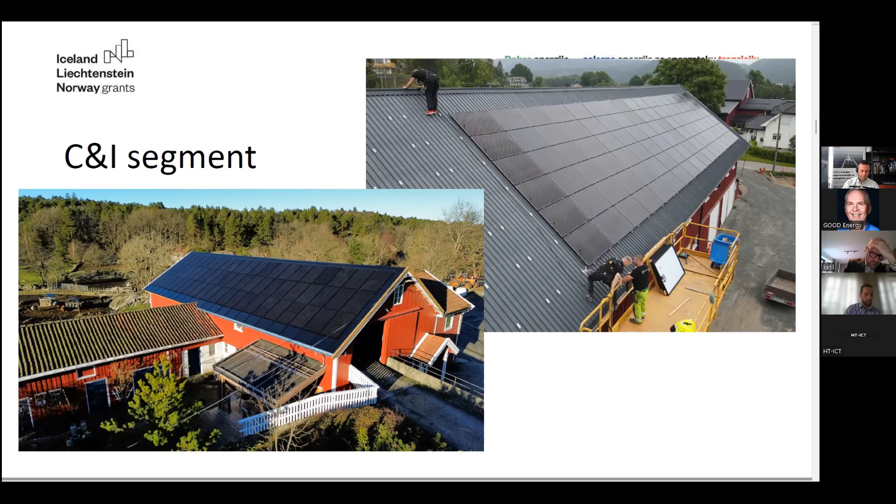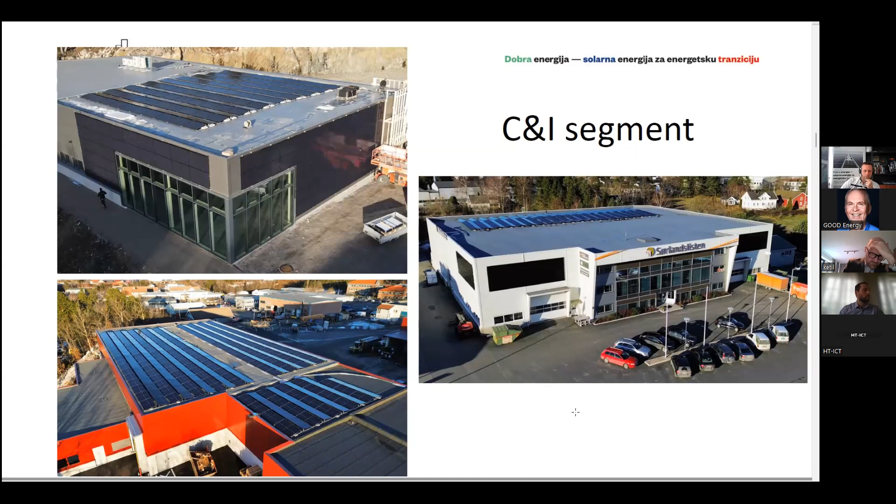And on the west facade. And this is actually our warehouse. So the picture on the bottom left side is where we sit, and here we have really tried to max out the number of panels on this building. It's here that we have one of our warehouses in the south of Norway.

It was not our main focus a year ago, but now it is clearly ground-mounted solar parks, so utility scale constructions. As I said, we are building a 45 megawatt park in Bosnia. I don't have a picture of it here, but I think it's coming later. Here is an illustration picture of a park that we will start construction on in a few months in Norway. So this is an illustration picture, and it's a 6 megawatt solar park.

We are still waiting for a few agreements, but we expect to start building it very soon. This will be maybe Norway's first ground-mounted solar park. There have been a few pilot installations below 1 megawatt, but this will be the first utility scale grid-connected solar park.

I think I had a small video of the park in Bosnia, if it works. We'll see.

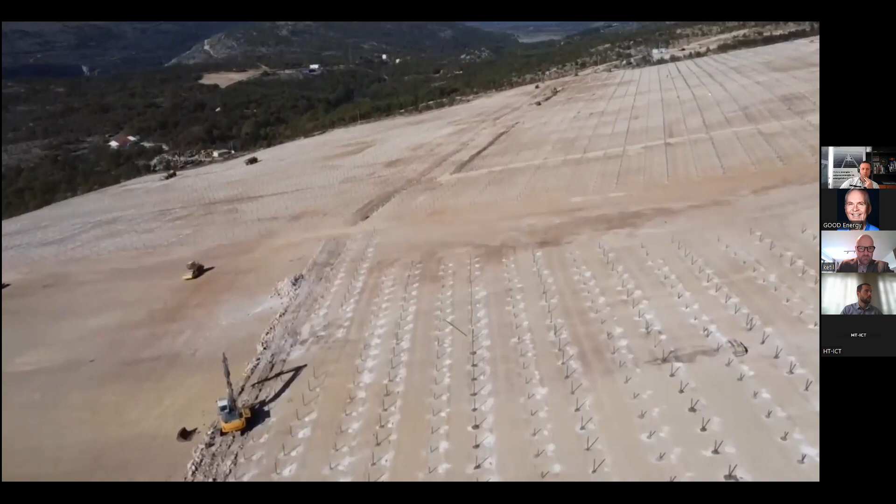Okay, back to the presentation. So that's the solar park I was talking about. That was already a few months ago. So now the panels are coming actually on all the mounting systems.

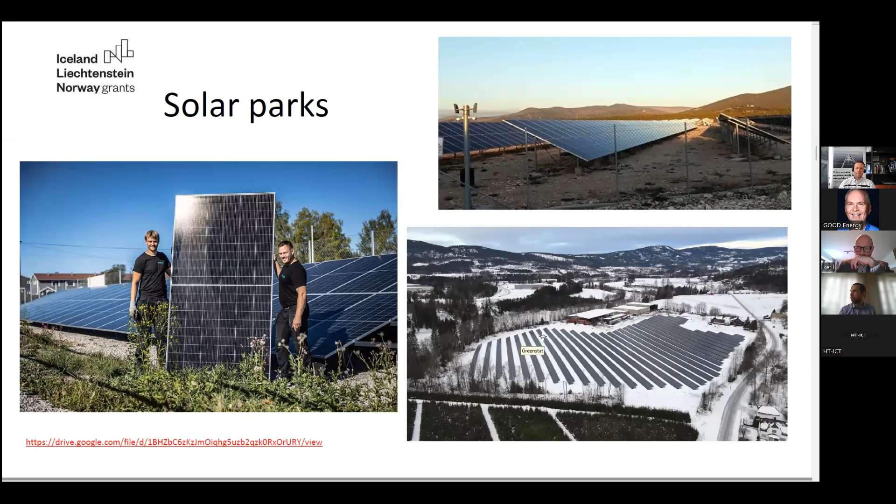Solar panel technology. So how does it work actually, a solar panel? It's a panel that absorbs light and converts it to electricity. It should not be confused with solar thermal panels that are producing heat with fluid, which can also be used for heating water, for heating needs in buildings. But when it comes to electricity, the best is to use photovoltaic panels. So it's the photovoltaic effect.

The goal is to absorb the photons, the particles of light, harvest them, and make as many electrons as possible. Electrons are what conducts electricity. So we see the spectrum of light coming into the atmosphere, the one with the colors. It starts from ultraviolet to the visible spectrum, what we can see with our own eyes, to the near infrared and high infrared wavelength. So here it's in wavelength.

And then we have to choose a material that can absorb this light and convert it into energy. Silicon is the most used material today. Many alternatives have been under various research stages, but none have managed to surpass silicon in terms of efficiency and costs.

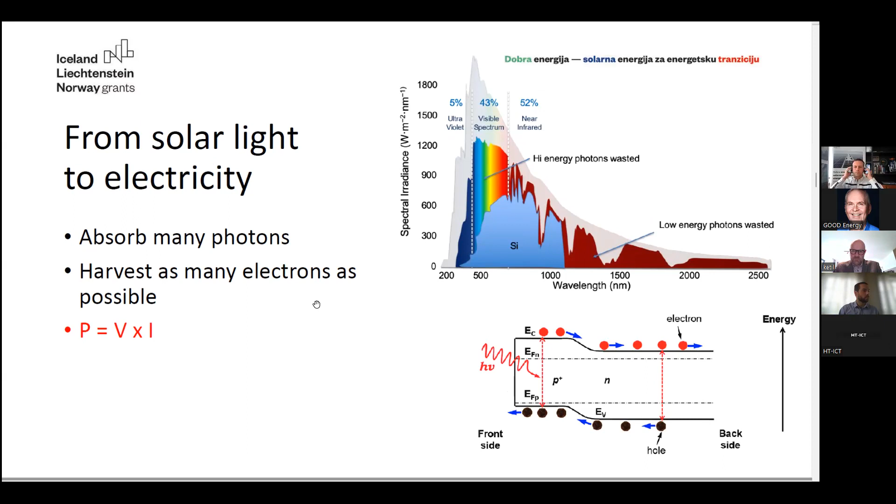Then came the PERC solar cells, which are not shown here, which is now the main technology. It represents, I think, 50% now of market share.

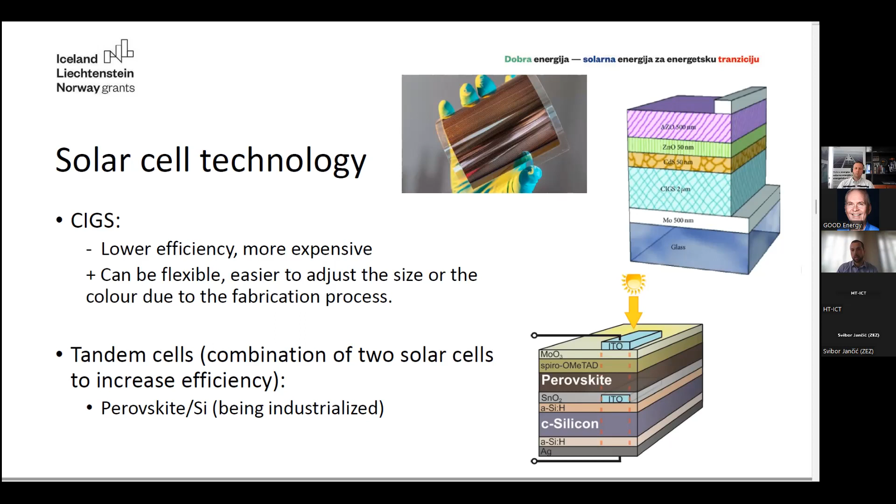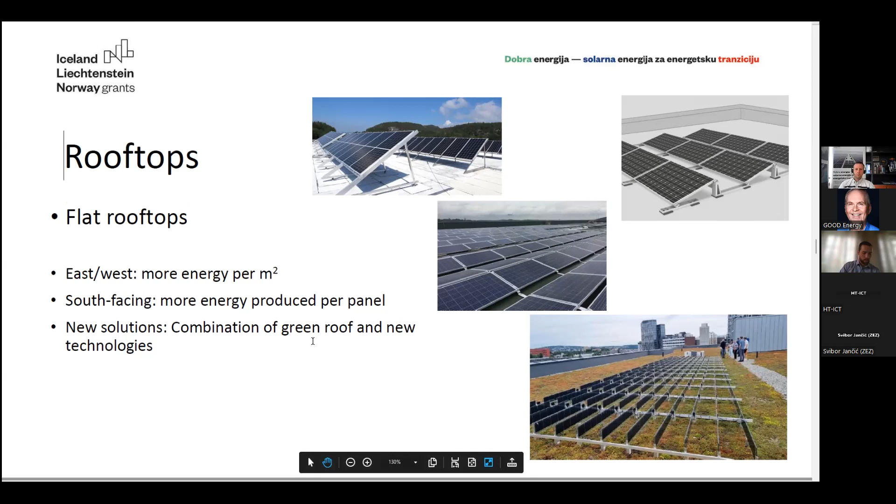Why doesn't it want to go back? I'm not used to PDF, I guess. Why does my keyboard... just give me a second. There you go.

So, pitched rooftops. For pitched rooftops, there exist many different mounting systems to adapt to every kind of technology - for tiles, for flat tiles, for metal sheets. You can also integrate it into the roof. There's also something called bituminous rooftops. Some of them generally don't have a very high slope, but you can have like 10 degrees, and there are also technologies made for installing panels on these rooftops.

So for whatever type of rooftop that you have, there is something that can be found to put solar panels on it, basically. These are actually installations that we made, and I wanted to highlight this one, which is, as I talked about briefly, integrated in the rooftop. We see the solar panels, and they have actually replaced - there are no building elements under the panels, just some frames that make the panels waterproof.

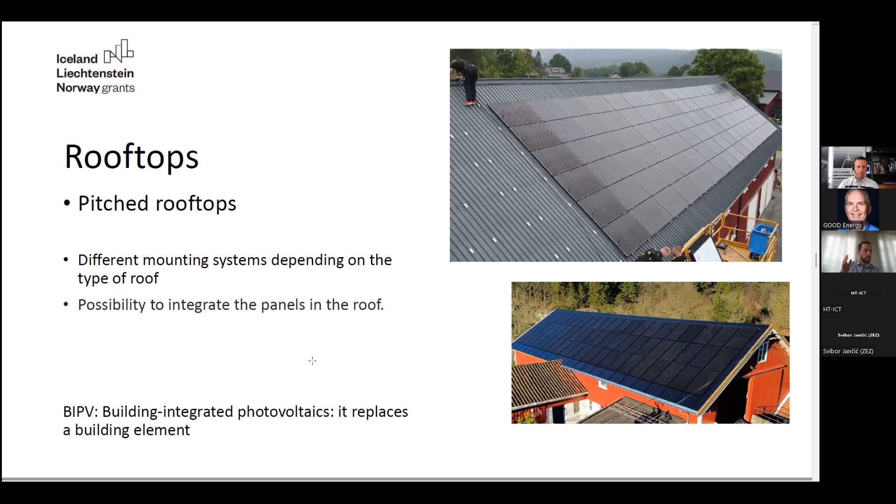Facades, many possibilities with different panels and different colors. We have mainly, in our company, dealt with silicon panels because it's the cheapest. They are just black, so they are not the most aesthetically pleasing panels, but as we were dealing with industrial actors, the financial aspect of it was very important. So it's the panels that give the shortest payback time, basically.

They can be installed on existing facades, but also integrated in facades. Another technology is CIGS, and as it's a printed technology, it's much easier to adapt and have different panel sizes. So you see on this picture, all that is blue, kind of golden, and this azure blue or green, are solar panels with different sizes. You don't see the solar cells in them because they have no solar cells, so it's a bit of a different technology. I think that's what has been used also on this building - it's CIGS.

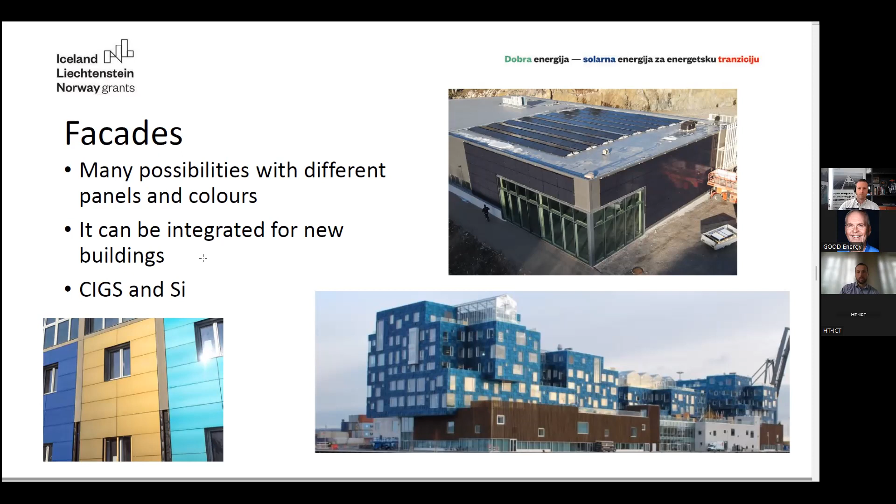Integrated panels - panels can replace building elements and give a new aesthetic to buildings. Here, for example, it's a solution with these tiles. I don't know the name in English, but it's these old tiles that you could find on churches and in many countries in Europe that have this diamond shape. But here, actually, all of them are solar panels. So you can really see that there exist technologies or solutions for every kind of building, for every kind of historical looks or criteria, or for financial criteria. Here is also an example of very small solar panels to make a kind of canopy.

It's bifacial, so I think it gives a very futuristic look to the building to have bifacial panels, because you see the technology, but at the same time, it's well integrated. It gives like a glass aesthetic.

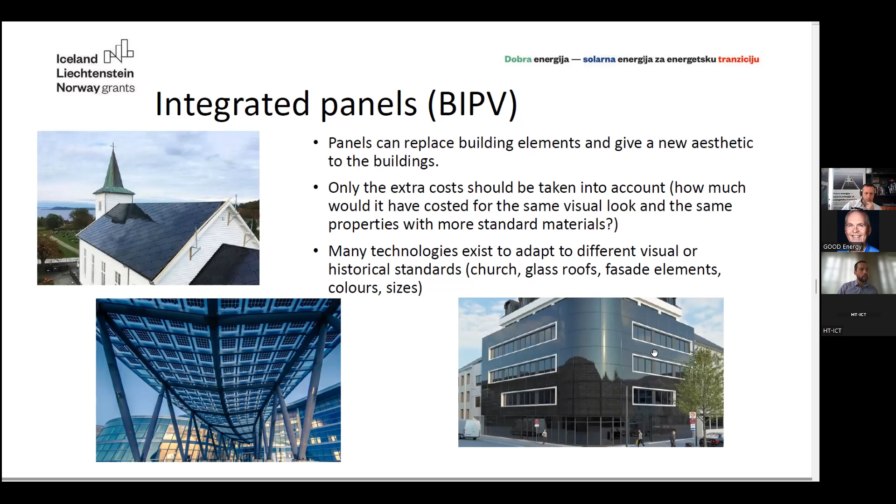And here the solar panels are in the facades. So many technologies exist to adapt to different visual or historical standards: church, glass roofs, facade elements, colors, sizes. You just have to pick what you want, and there is certainly a solution for that.

As I said previously, if you want very bright colors, like people have said, 'oh, I want to have a white facade' - well, if you have a white facade, then you're gonna reflect most of the light back. So the clearer the facade, or the color of the facade, the less energy you will actually absorb in the solar panel, and the lower will be the efficiency. So you can find efficiency sheets according to the color that you can order.

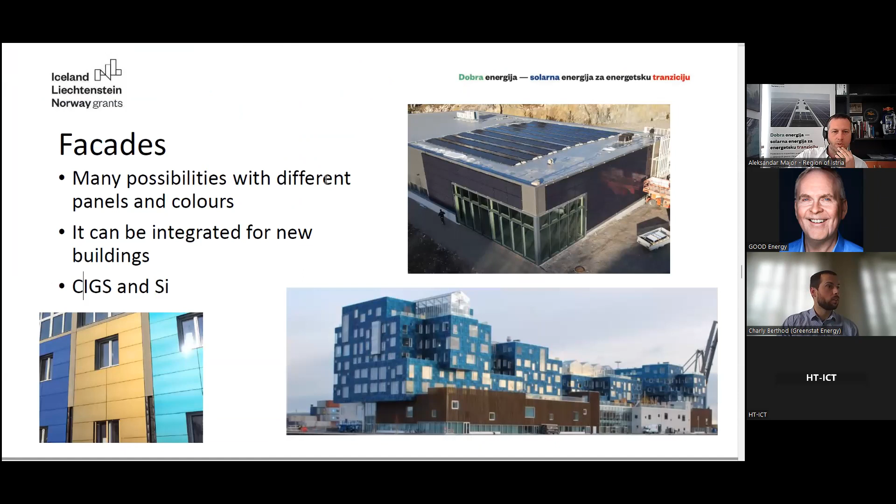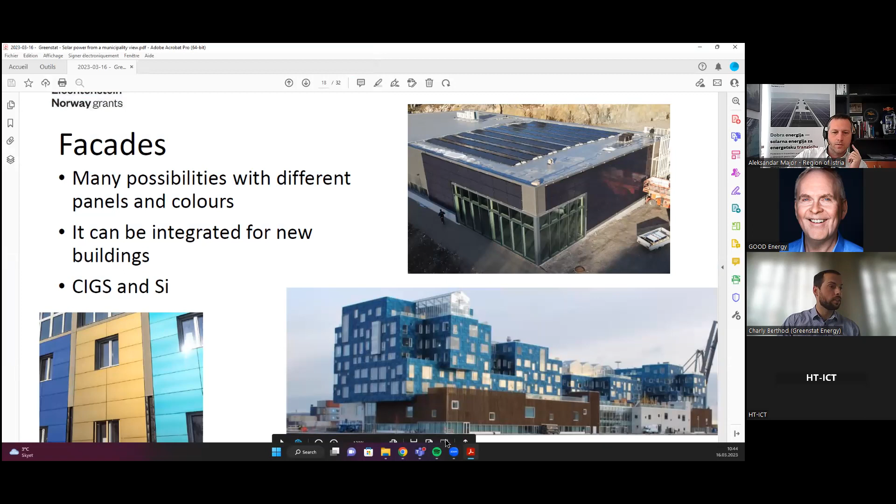Oh, I have to stop rolling. My bad. I'm just too used to PowerPoint, I guess. Ah, there. No, I don't want to have this one here. There you go, I think we're back. No, we're not. Why is it in the... I don't want you here. Yes, now I have it. I don't have it at all. Okay, Charly, maybe try using page down. It might be easier. Page down, yes. Yes, okay, then I change of keyboards.

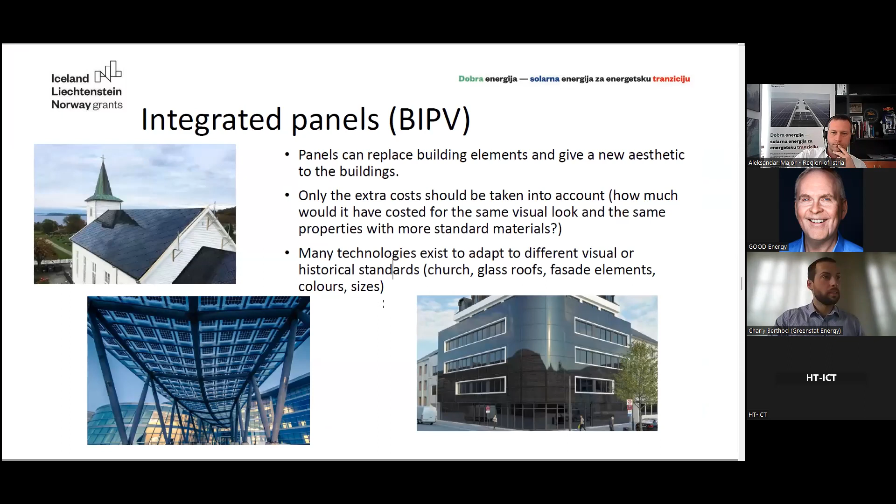Page down. Now we'll talk a bit about the economy and understanding how the system works actually - production versus own consumption and costs.

Something that you need is an inverter. So a solar panel will basically produce electricity, and it's going to be DC electricity, so DC power, meaning direct current. So it's like a constant current and not an alternating current, which is AC. And AC is what we have from all our grids all over the world. So you need to convert this DC power into AC power, and that's the role of the inverters.

There exist string inverters, the most versatile one, the most used, and the only drawback is that if you have a bit of shadowing along a string - you connect many panels in a string - if you have shadowing on one of the panels, which is very often the case on residential buildings, where you'll have an electrical pole, light pole, or a tree, or anything that will put shadowing on one of the panels, then it will affect the whole string of panels. What you can do is use power optimizers. You just put power optimizers where you think you're going to have shadowing, and then it's just going to isolate these panels from the rest, and your installation is going to work very well.

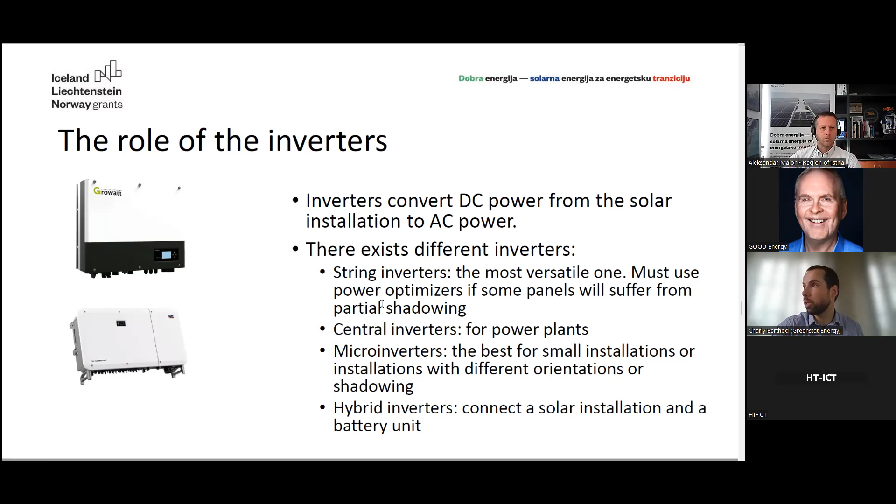And so inverters are then connected to the electrical board of the building. The energy will first flow - this is for the solar installation - inside of the building and cover the consumption in the building before it is sent to the grid, in most of the installations.

If the electricity produced from the solar panels is not enough, then electricity will be bought from the grid to cover the consumption. If too much electricity is being produced from the solar panels, then there will be an excess of energy, and this energy will be sold to the grid. So a solar installation will first cover its own consumption, the needs in the building, before being sold to the grid.

There were some other standards, as I recall, from 10 years ago, where you had to sell everything to the grid first. But I think that now in most countries, this is not the case anymore, and first you need to cover your own consumption.

What we recommend and what we do, at least for our customers, is to have simulations with at least hourly data of the consumption, and then simulate it with the production to see how much of the electricity per hour is going to be consumed in the building and will be sold to the grid, to make a financial analysis.

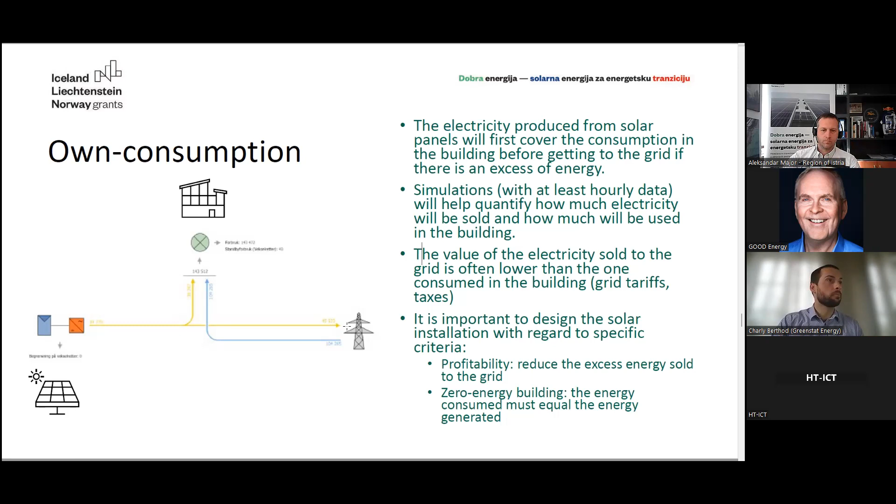Solar production in Croatia, especially along the coast, has some of the best solar resources in Europe. You can find the same in some parts of Italy, Spain, and Portugal. It's really high, getting above 1500 kilowatt hours per kilowatt peak is a lot. This kilowatt hour per kilowatt peak ratio means: if you install 1 kilowatt peak, how many kilowatt hours will that panel produce? It's used to compare different parts of a country and to say something about the irradiance and solar resources.

Electricity prices and their volatility have strongly increased in Croatia. Before, electricity prices were quite stable like the rest of Europe, but then, due to the war in Ukraine and instability in prices which depend heavily on gas prices, we have seen these big fluctuations. Today in Norway, for example, which has a lot of hydropower, we've also had very high electricity prices, and the payback time of most installations is about 8 years. I guess Croatia will have even shorter payback times due to better solar resources.

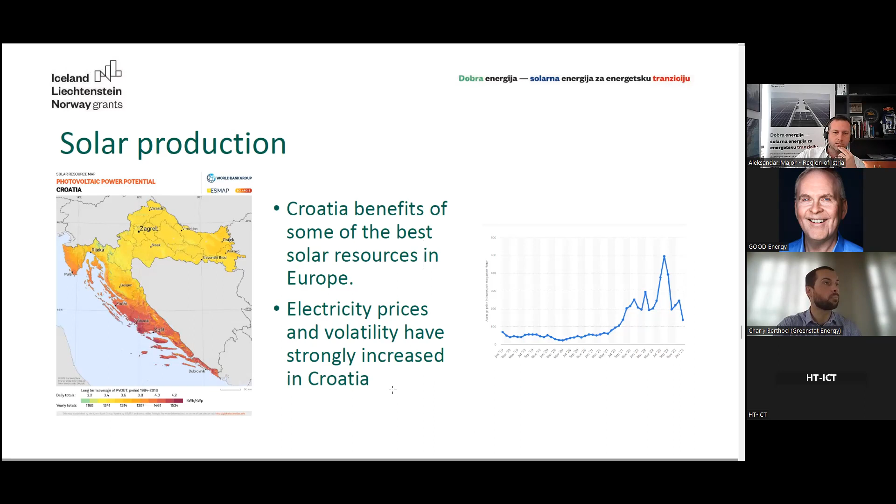The operational expenditure is approximately, for small installations, it's hard to have a service agreement, but for large enough installations, they usually charge around 1% of the investment cost per year.

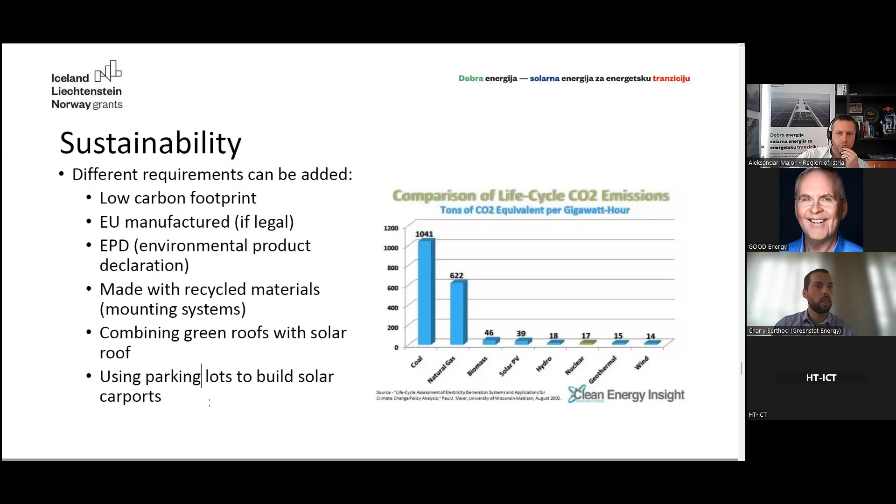Or you can also use parking lots to build solar carports. I don't think I've shown any pictures, but there are more and more solar carports being built. France has come now with an obligation for all parking lots with more than 60 or 80 parking spots to cover their spaces with solar carports. This makes a lot of relatively big solar installations in very gray, dead areas covered with asphalt—but you can still use these places in a smart way to produce more solar energy.

Now a bit more about public tenders and what role municipalities and countries could have—public purchasing power.

Something very important is that public purchasing power must be used more to achieve climate environmental goals. It's commonly said in Norway, at least, and usually it's these public tenders that can set new standards in the construction field. For example, in Norway, now we have zero emission construction sites, so all engines must be electrical or work on hydrogen.

You can require EPD for all the materials for new buildings, you can set standards for zero energy buildings. Usually it's going to cost more, so it might not be a good financial decision. But generally speaking, public tenders is what starts new criteria, and it's what will build competencies in a country.

So if you see that many buildings need to be renovated in the country, to start with the public buildings and start new competencies is very important, and that we have seen in Norway.

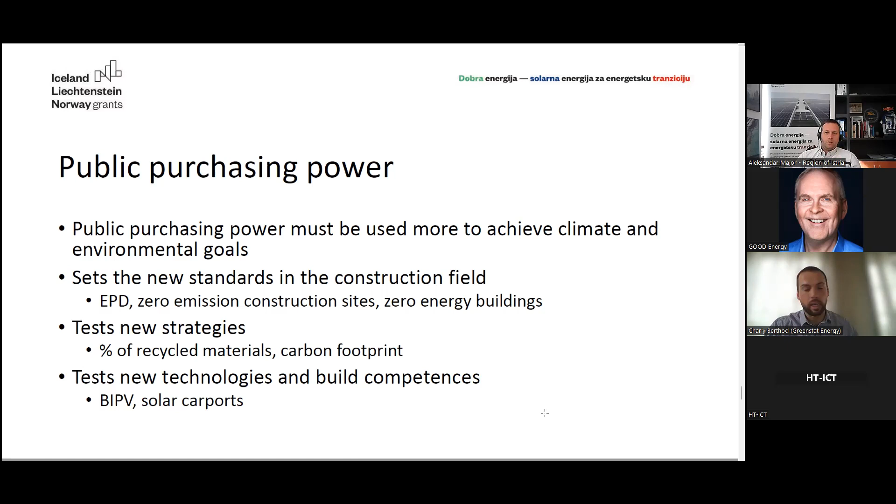Some measures that were taken are not on public tenders, not on public buildings, not public procurement power, but local measures made in different counties or communes in Norway to incentivize solar installation. For example, there is an incentive in one commune in Norway called Oslo for all the residential buildings that are housing associations and sectional flats.

So when you have flat buildings, it's very hard to connect the solar installation to every electrical board in every flat. So what is being made is that you connect it to the centralized electrical board. One problem with that is that not everyone can benefit, it can be a bit unfair in some places, and some of the regulations, for example in Norway, are not in place.

The regulations for sharing electricity between different private persons, for example in the flat building, or between different companies, is not in place in Norway. And as I've understood, it's not in place also in Croatia. So they have made incentives in some communes so that they will still use these buildings anyway, even though the regulations are clearly restricting something that should be financially viable. They are restricting that.

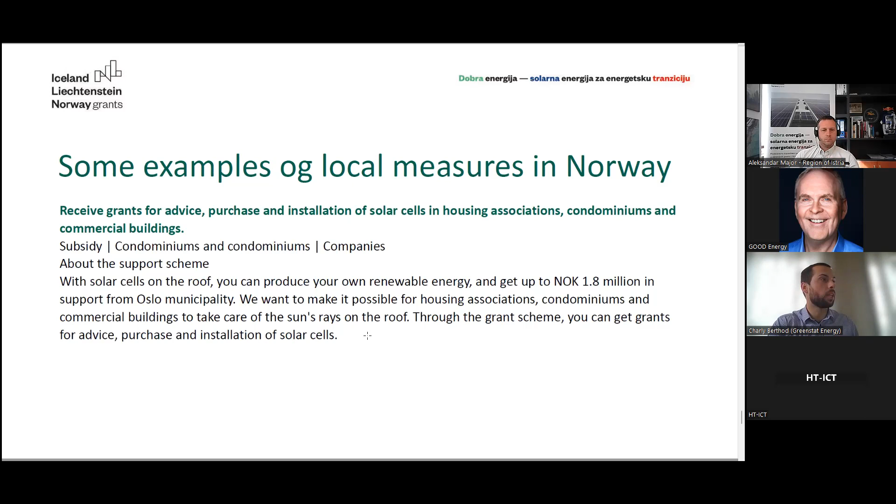Another measure for the residential market is that in the Oslo municipality you will have an extra subsidy for solar installations. I won't go too much into the details, but you get a grant for advice, purchase, and installation.

But something that was made also in a complete county is that too many industries are actually not aware and don't have enough information about solar installation. So there were grants made available for feasibility studies for solar installation, so companies could then ask another company to provide them with a quote and to make kind of a financial analysis to know if it's profitable or not.

And then they don't pay for that, or like they pay just 25% of that. It creates awareness among the industries for solar installations, and that it can be actually very profitable for them. So it's a very cheap way for public actors to increase locally produced energy—just let the people be aware that it's profitable, basically, and just pay for the small costs of the feasibility study.